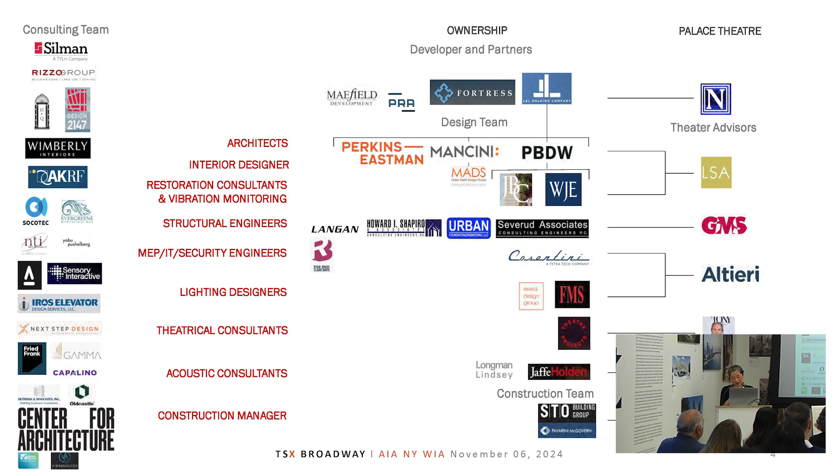So this is an immense team, and many team members here aren't even listed. It's a complex team, but as Rosalind introduced us, we don't have to reintroduce ourselves. A bit about the team: you can see the various stakeholders, including developers, owners, the theater - Palace Theater, which had its own consultants - along with sub-consultants, engineers, and peer reviewers. We tried to create an org chart for this, but it was very difficult to make it linear because a lot of communication was going circular, as well as working with the various stakeholders.

Beyond the technical expertise of the team, communication was key to understanding expectations of multiple stakeholders and decision makers, and how we coordinated amongst the owners, the developers, the consultants, the peer reviewers, the designers, and technical engineering. The success of this project really was the relationships and how we communicated with each other.

Just a broad overview on TSX, 47th and 7th Avenue, where the TKTS booth is, which Perkins also designed. It's a major redevelopment of a transformational public realm, with an indoor-outdoor public stage element that engages Times Square. If you've seen performances by Snoop Dogg or Jungkook from BTS, when that stage opens and is projected onto Times Square, it's quite immersive and engaging. This has become a cultural and hospitality destination, with a historic theater component and its elevational lift to create more retail space below. There's a whole story here that you can't even capture in 1.5 hours - it's only one part of the story.

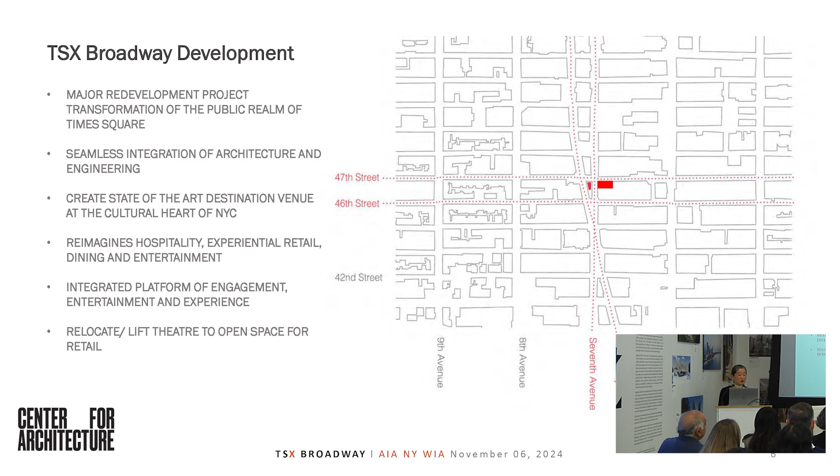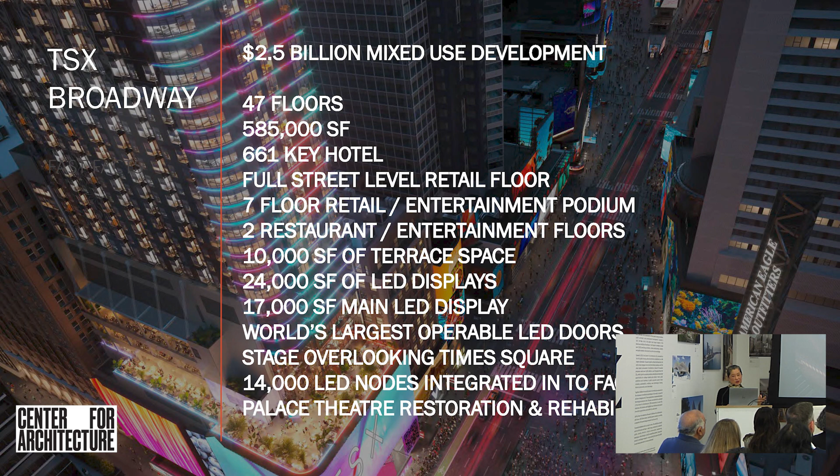This is a $2.5 billion redevelopment, including 47 floors with a hotel up above. There's lifting of the palace and restoration and rehabilitation of the Palace Theater, which created new retail space, as well as over 24,000 square feet of display screen that engages the public realm while providing signage. This entire building can be lit up with signage, terraces, and hotels - it has become a hospitality destination with a hotel component and the theater.

Some of the challenges included team coordination and integration of the various teams. However, we had regulatory improvements that included landmarks, retaining the zoning floor area, and looking at partial demolition. So if we go through a sequence of operations - the partial demolition, the stabilization of the theater, the lift of the theater - we can describe the regulatory review processes as well as historic preservation and restoration.

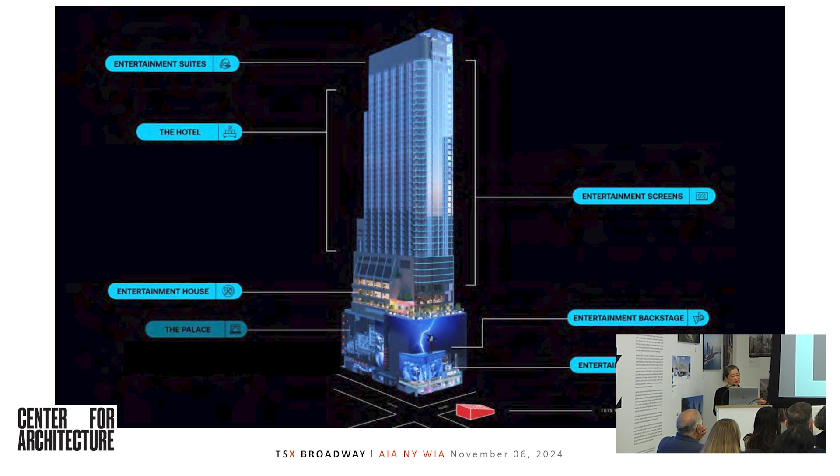As a broad overview of the development, you can see here the podium with the retail space and theater, as well as the indoor-outdoor stage and the terraces that have hotel floor lobbies. This communicates with the hotel, restaurants, as well as entertainment LED screens incorporated into the facade. Before getting to specifics of the theater, I wanted to give a broad overview of the code.

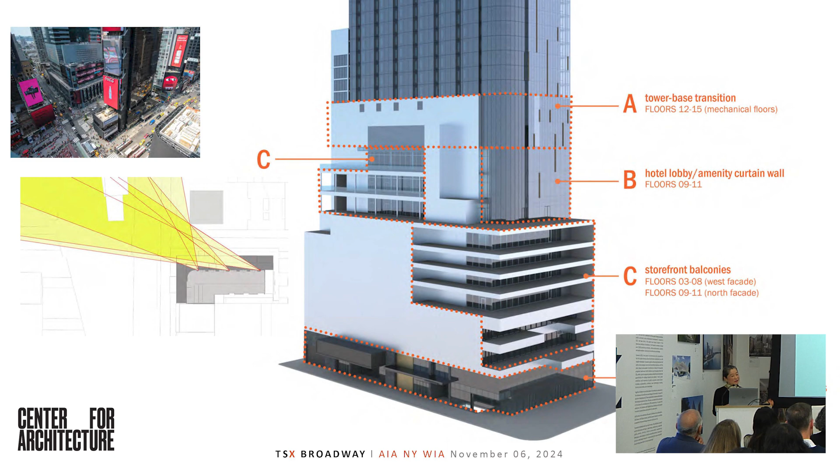This is behind the signage, and if you've walked through Times Square, that signage is very immersive. Behind the signage there are obviously components of retail balconies, a podium in the hotel lobby, and terraces. The facade was incorporated to try to capture the views of Times Square, especially with the hotel windows. You can start to see here on the lower left diagram the views from the hotel rooms.

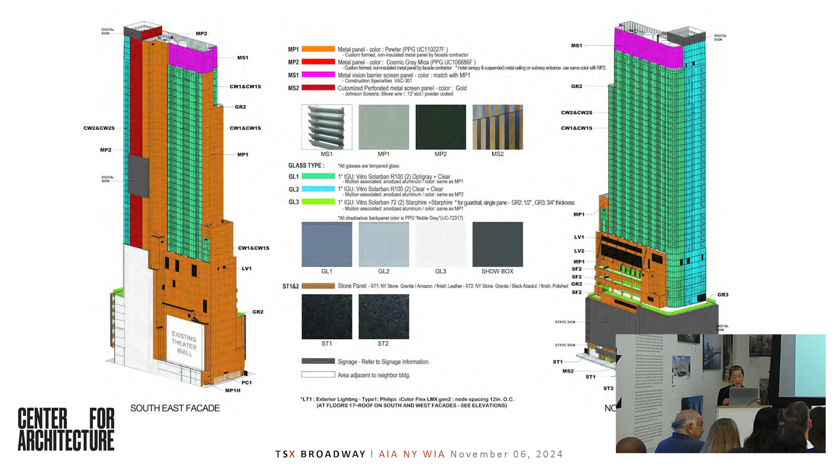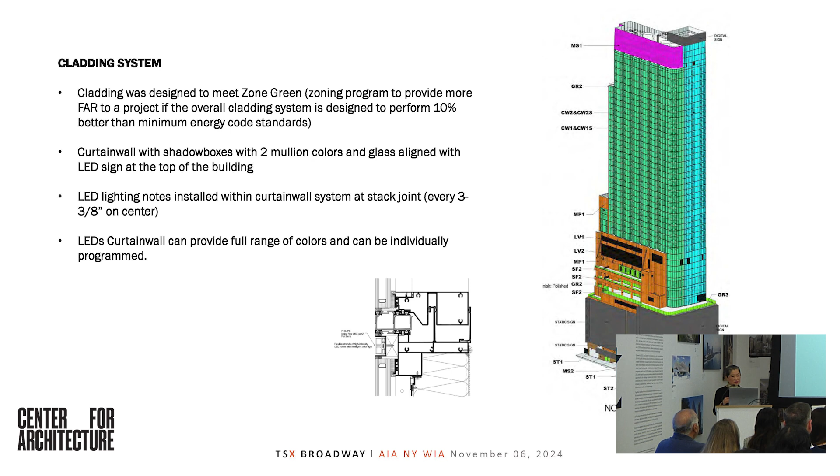Just a brief overview of the cladding - it was designed to meet zone green to get more FAR, with colors of mullions for curtain wall systems as well as metal panels, and organization of the curtain wall with the LED signage that's aligned. You can start to see a bit more development on how the signage works overall. There are LED nodes at every stack joint, so they are totally programmable with the full range of colors.

Thank you, Mindy, for the introduction to TSX Broadway. Now I'm going to invite you, the audience, to step back in time with me to take a look at the development of the site and also to consider the historic interior landmark, the jewel at the heart of TSX Broadway, which is the Palace Theater.

It's important for me to let you know that the perspective I'm going to provide comes from my experience of almost 10 years on the project, 9 years to be specific, straddling two different companies and two different kinds of experience. I was the project architect and project manager with PBDW Architects at the inception of this project in 2012.

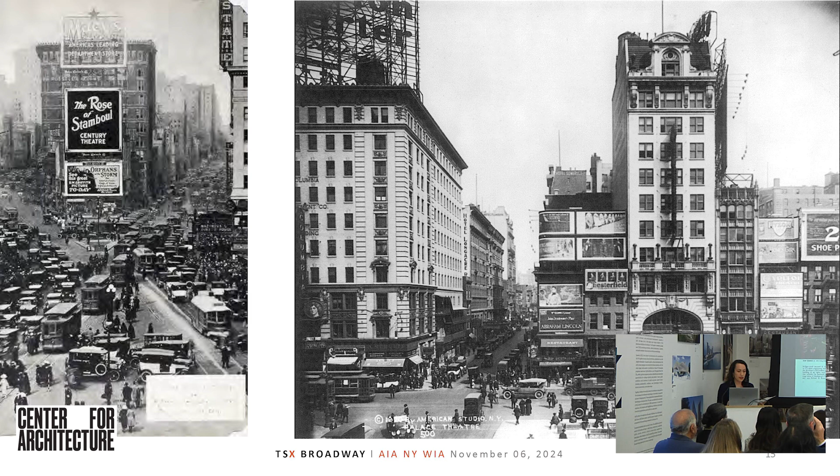So here's this development celebrated. The theater is not necessarily much impacted by this development. Let's remember this is an interior landmark.

Then 2012 comes along. A former client of PBDW, an architect and developer, had this motto: 'We need to design the opportunity to design.' And so he did. He passed by that building.

This photo is from around 2017. He looked at the theater on the ground and realized: if he lifted the theater, he could create two additional levels of retail. If he were to demolish up to 75% of the zoning area of the tower, he could then rebuild it to meet more modern standards.

He could also improve the urban environment by addressing that hodgepodge of signage we see there, and that corner has an MTA entrance to complicate matters further. Let's all remember that. So this was what the opportunity to design gave us—a lot to design.

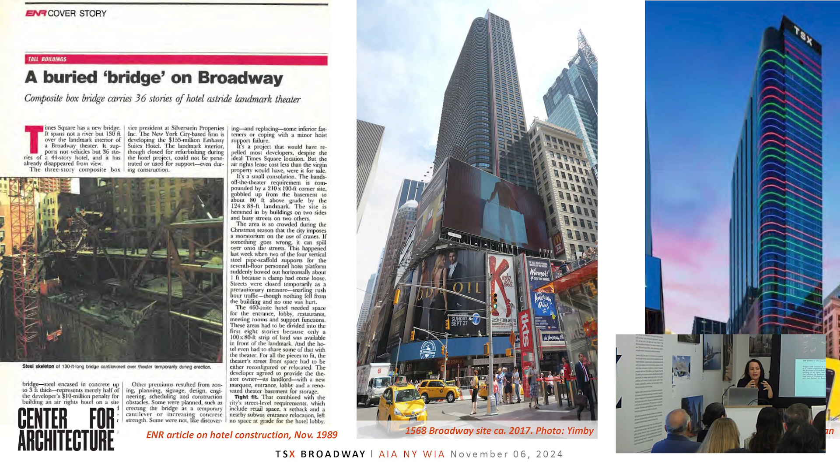It was very clear that at the core of that development was this Fabergé egg of a theater, which needed to be carefully conserved, preserved, protected, and monitored so that the lift, planned from the project's inception, could occur successfully—so it could be lifted and snugly fit into the concrete and steel bowels of TSX Broadway.

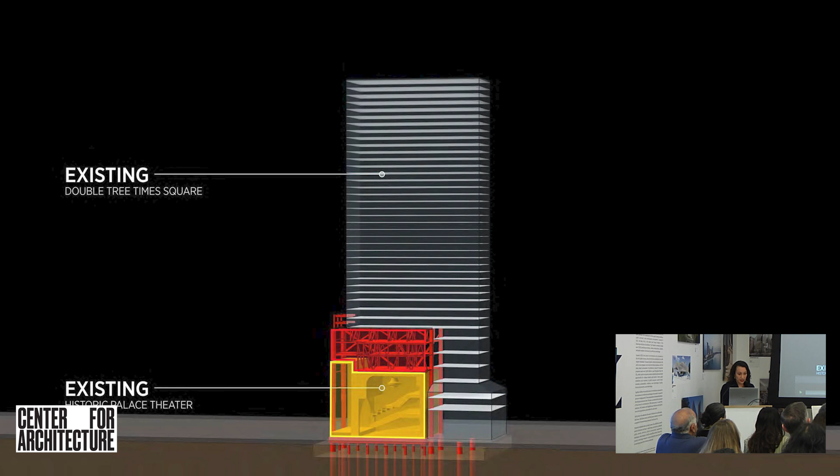This video shows why we had reasons for concern. There was a lot of construction activity, vibration-inducing activity, and WJE was heavily involved in vibration monitoring, using crack gauges, data loggers, and tilt meters, all implemented very early on. Let me start this video so you can see what we mean by vibration-inducing activity.

And I thought it was my video sound.

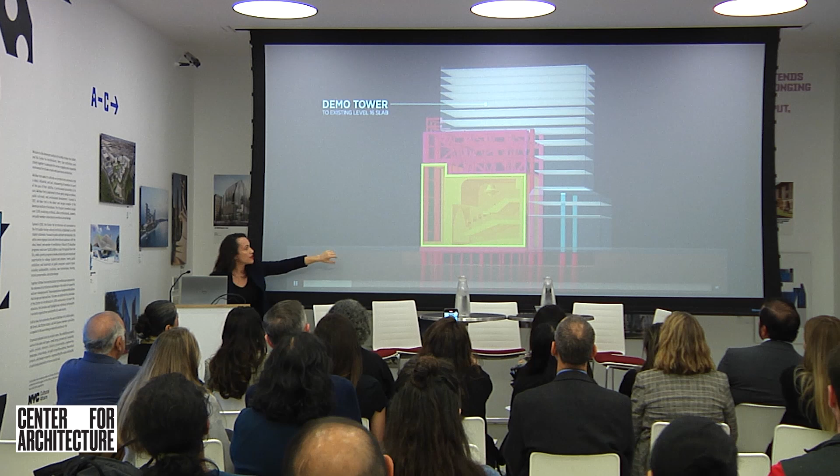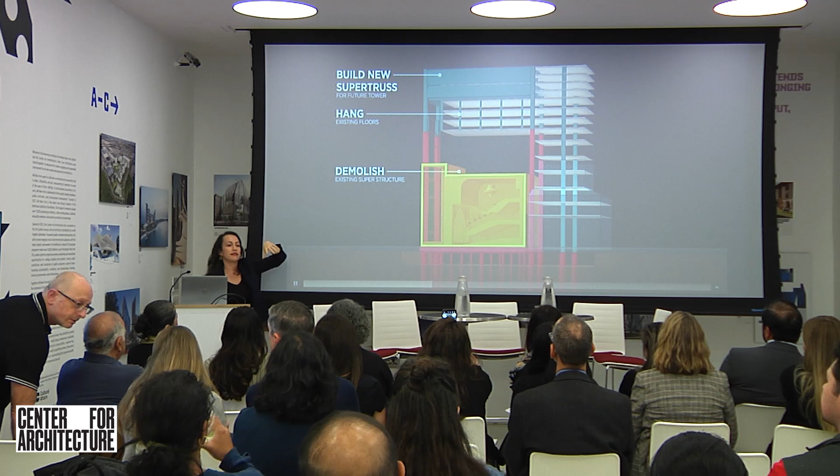At any given moment, you would have the Fabergé egg at the heart of the theater. Meanwhile, we needed to prepare the cellar, excavate, because we needed to provide a ring beam all around the theater and provide new lifting posts in order for the theater to be lifted. Meanwhile, the tower needed to be demolished. I said 75% of its zoning floor area, 25% retained, which allowed the rebuild to have the same square footage of the previous zoning resolution.

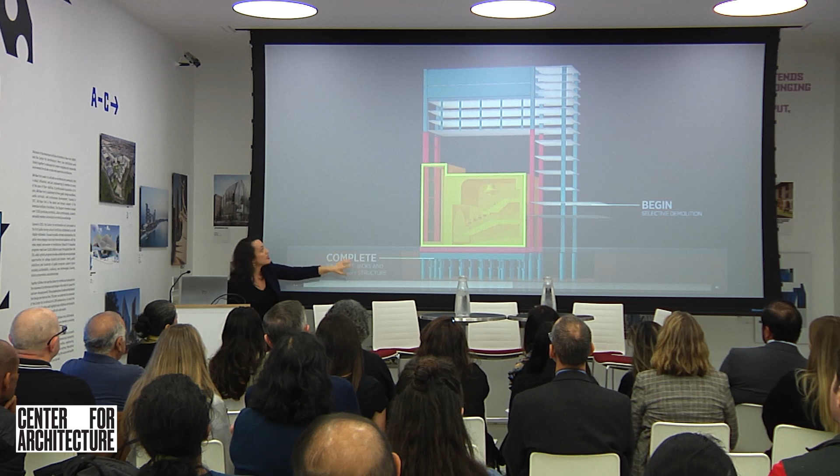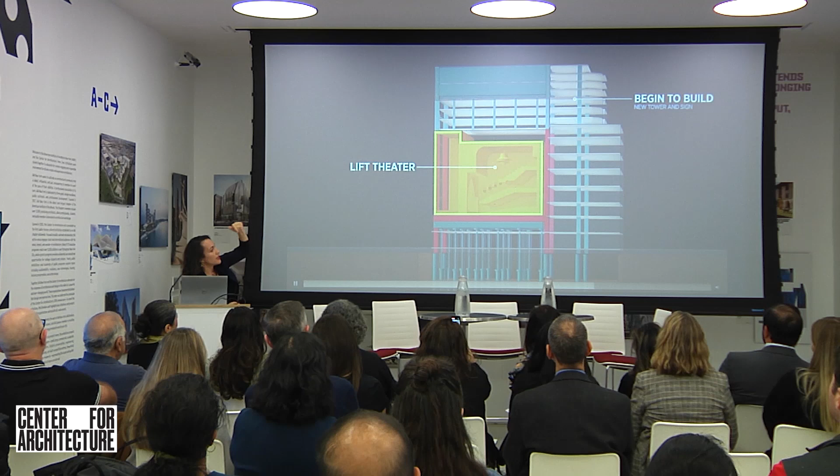Meanwhile, we have ring beams in place, the jacks are all in place, the temporary structure is all in place, but we needed to clear the top of the theater, but before that we needed to build a new structure that could support the floors above. And here comes the Fabergé egg, snugly fit in its new position. Then the full construction and reconstruction of the floors, led by Mancini and Perkins, took place, and the development was completed. That sets the stage for us to remind ourselves that if it wasn't for the lift of the theater, TSX Broadway would not exist.

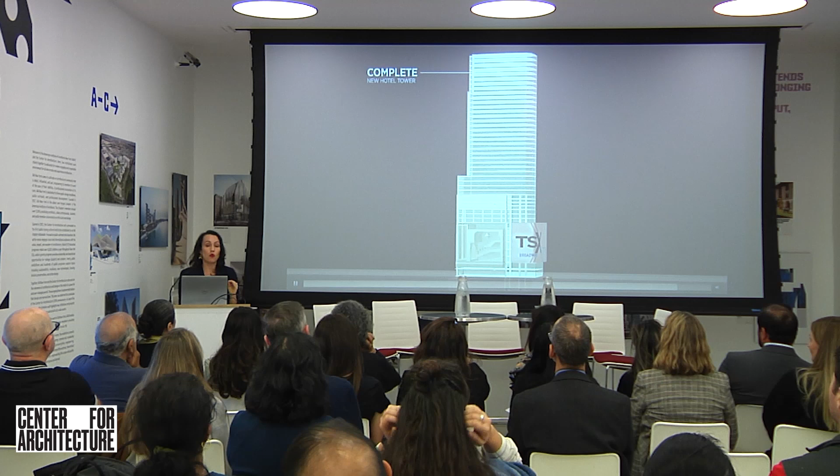One of the main early regulatory approvals we got was in 2015. We obtained approval from the Landmarks Preservation Commission to do this. They accepted it with a number of considerations. From that point on, we had a very close relationship with them in order to provide mock-ups, materials, a very long negotiation, which was really extensive.

Meanwhile, that also gave an opportunity to engage with a panel of advisors for the Nederlander organization. One of them is Judy Salzman, who's here, who's been engaged since 2015. So I invite Judith to come join me and explain, from her seat as the owner, or advising the owner, how she saw the development from her perspective.

I was brought in 2015 by the Nederlander organization, who owned and operated the theater since 1965. I've worked on a lot of preservation projects and theater projects, but when this was presented to me, the concept behind it, I thought, oh my God, how are they going to do this? It was one of the most difficult, complex, frustrating, and exciting projects in the course of my career.

As Deborah said, there was this Fabergé egg, and everybody who worked with me on this project knows I was very, very concerned, because I had worked on many plaster projects that had ornamental fibrous plaster, a material used in the late 19th and early 20th century that is subject to degradation from the environment, from water, from use. I had seen plaster collapse in theaters that weren't being lifted, weren't having excavations, and had a great deal of concern.

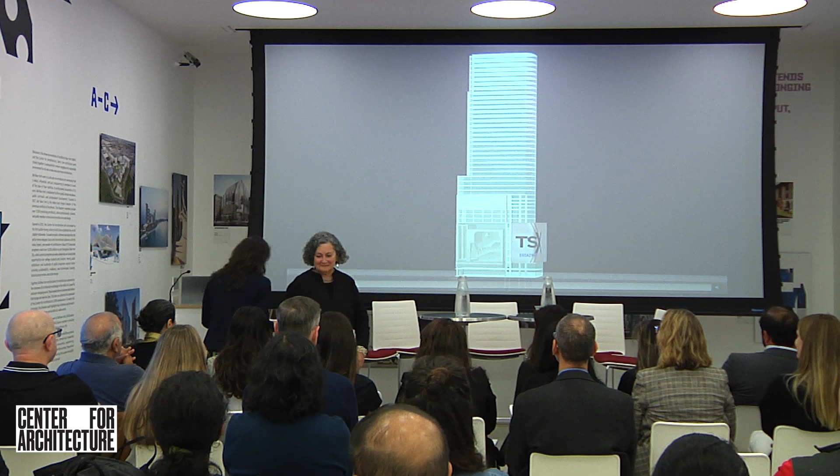So give you some insight on what we're dealing with. The photo on the left is actually very telling for us, because that's the moment when Judith suggested that WJE should get involved, given the concerns with the terracotta flat arch above the ceiling, which supported the whole fibrous plaster that we see here.

So we got engaged around 2017, and a series of surveys parallel to the production of construction documents was taking place. In terms of survey, it's important to notice the proscenium arch and the two pendentives on either side - very hard to reach areas, so we engaged industrial rope access.

We had to clean the plaster because there were layers and layers of dust - you couldn't even see if it was cracked or if daubs were damaged. So there was a lot of this scrape work to be done as well. We put the matting, and from that point on we were doing architectural and material survey. Eventually the scope of WJE increased to include the entire plaster, all the plaster surfaces.

There was a lot in terms of design that we needed to do here. This is a full upgrade of the infrastructure - the theatrical booms and railings are all replaced, we're replacing MEP systems, and putting in new hot water radiators instead of the steam, which was causing leaks and damaging the plaster.

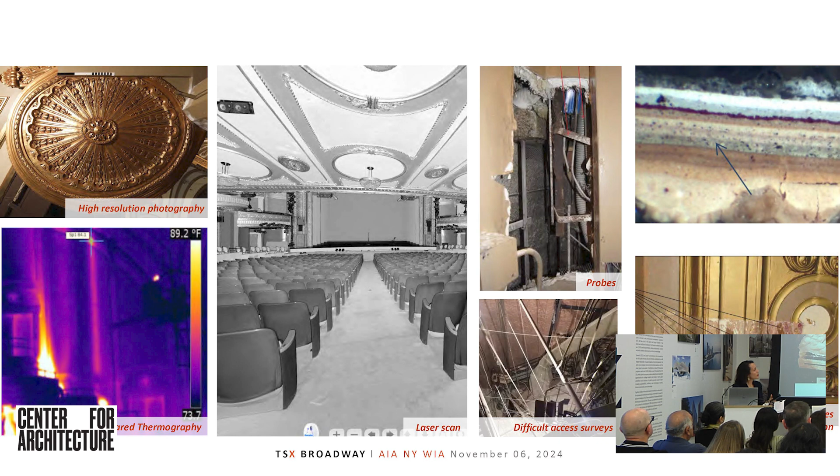Lessons learned here: probes, as typical, the difficult access that we mentioned, and then paint analysis, which the stratigraphy was done by Jablonski Building Conservation, which with PBDW, WJE were partners all along, working really close together with the advisory team. So mitigating risk was at the core of what we had to do, and that's the differentiation from your typical restoration project.

Here we need to prepare for pre-lift and post-lift interventions. So we worked with Evergreen Architectural Arts to have plaster casting made for virtually every decorative element in the theater. And these molds can last for a few years, so it will be useful for the client later on.

We also looked at some fragile elements, such as that register there to the right that covered, was all over the ceilings, covering ductwork, exhaust areas. Those only had very thin threaded rods as support systems. So WJE also got involved in designing the structural support for a lot of the plaster where it was shown to be defective or fall short from current standards.

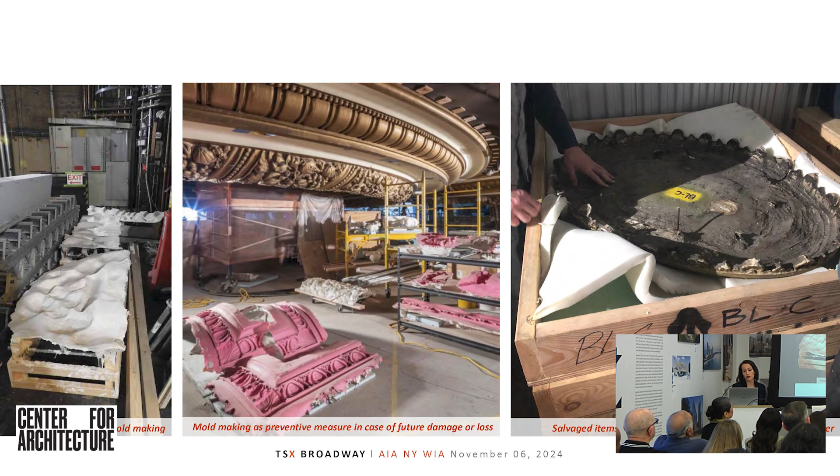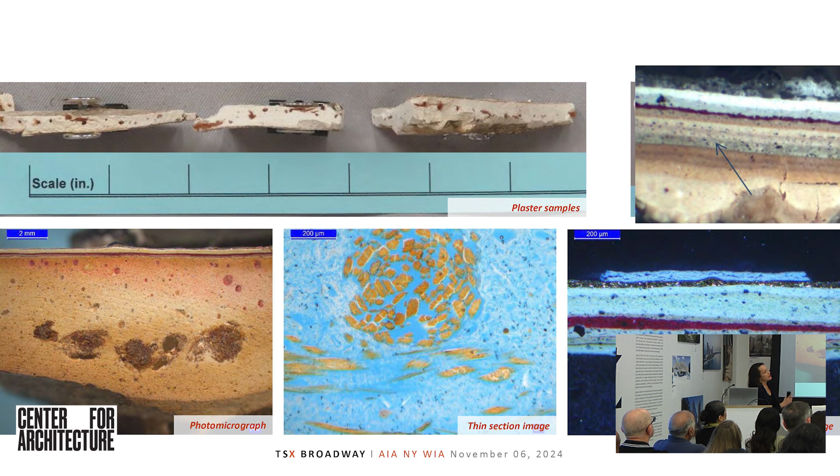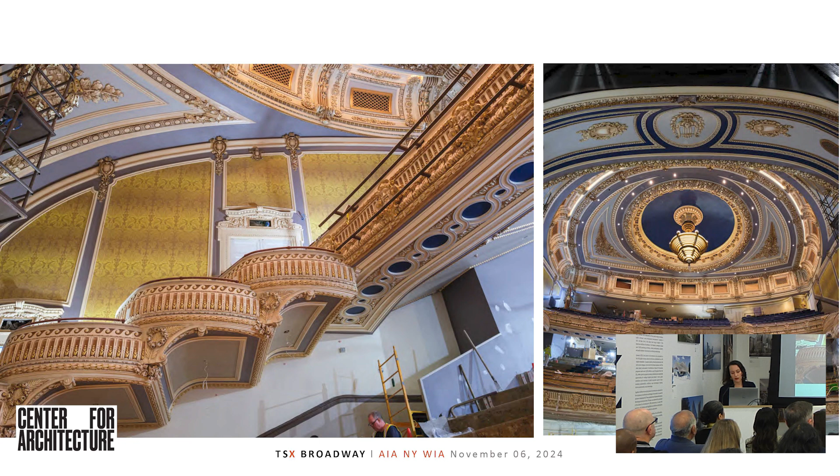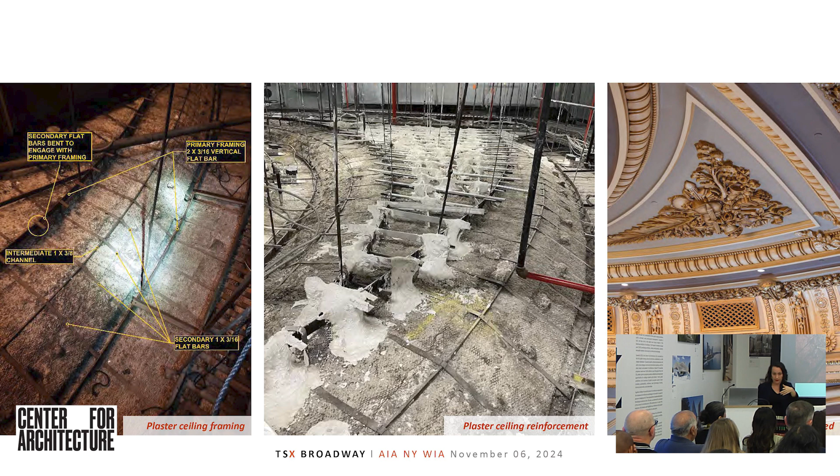This is a very interesting photograph for me. John's shaking his head like, how can she like this? Because this is a plaster dab. So under here we have stainless steel wire ties, really connecting these elements, the framing to the old framing or to the aluminum. And this was done pre-lift, and that's why it's interesting. Another aspect - we had to determine what to do pre-lift or post-lift, because if you plaster it and then you have an issue with the lift or construction activities, you have to redo that work. So you want to protect Allison from Structure Tone having to do it all again. And that's the final result there.

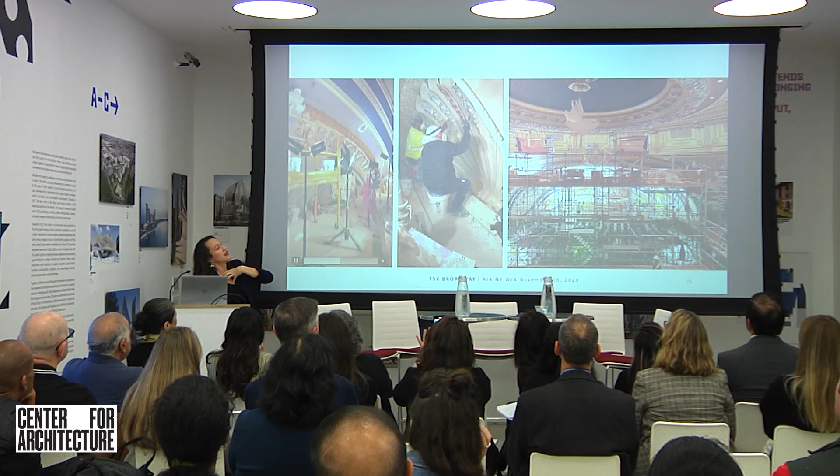Mock-ups. Not only paint mock-ups, but also, you see this sad swan of a foam core mock-up there above. That is me sitting at 3 o'clock in the morning, thinking, will the chandelier block the view from the follow spot booth? Even though the theatrical consultant had calculated it in the BIM, I could only relax once I created that with the team. After a whole day of going up and down, we decided to lift it 3 feet more. So the lesson learned is: do all the mock-ups you can, put all mock-ups you can on your specs, buy your mock-ups, do them in analog ways, and retest everything.

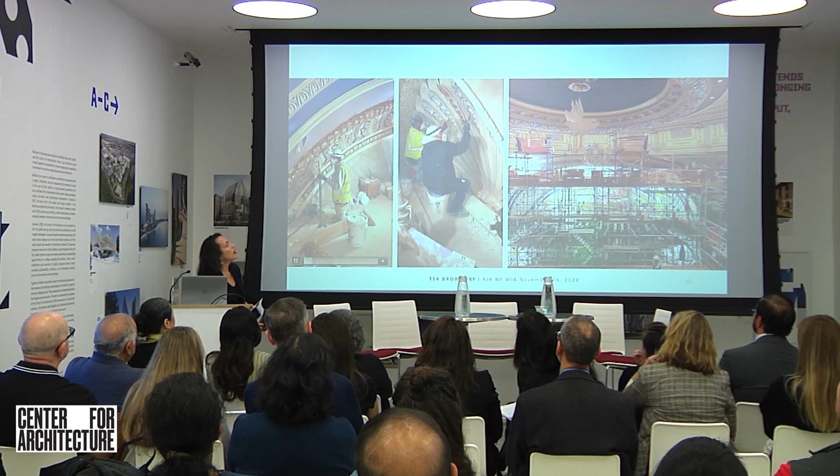And also the painting mock-ups. This for me tells me about one of the favorite parts of the project, which is about collaboration and communication. These are the decorative painters, the amazing team that Evergreen brought to site for us. You can see them gilded there, that's aluminum leaf, which was then glazed to look like old ivory and bronze.

Coordinating the hands of all of these men is a very difficult task, and we have to be there on site constantly checking and doing quality control as much as we could. That was a big challenge for everybody involved, but it was such a pleasure to work with people from this team. I really had the most beautiful time learning from them, arriving with the mentality that they're doing this day in, day out.

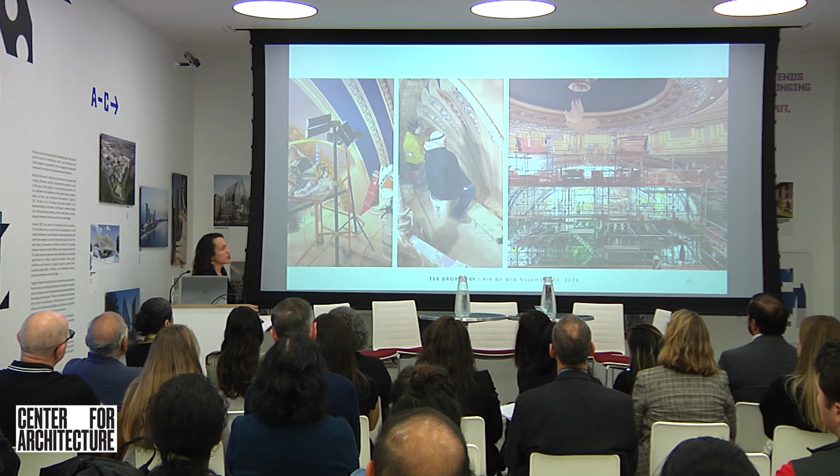Sorry about that, but that's how the site sounded like. True story.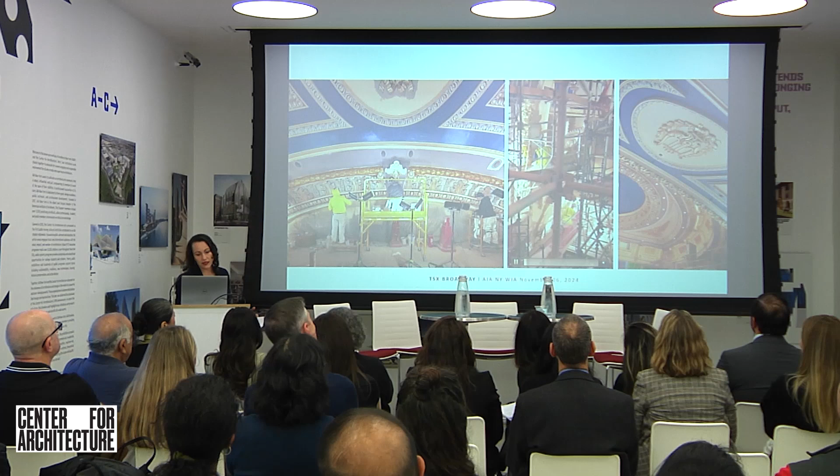But you can see the beehive of activity that it was at any given time, and access with the scaffolds, and just a lot of traffic that Allison had to be on top of people all the time. Monitoring of the environment was a key item, and that's how materials came in and out, and that was a big challenge as well that we must say.

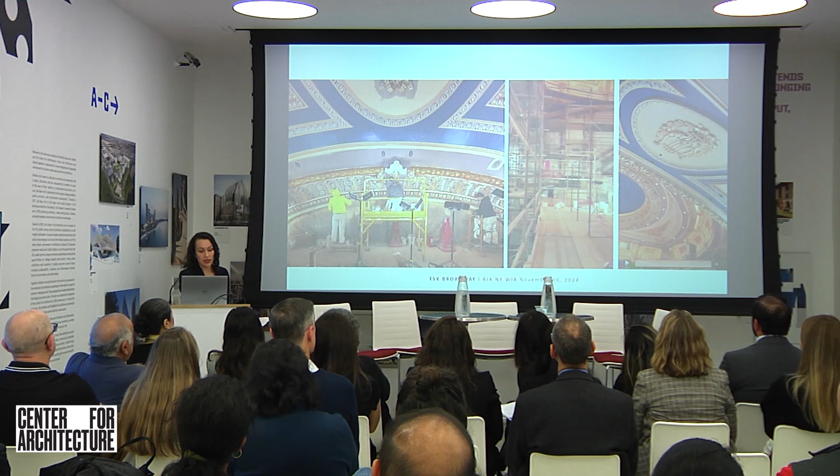Moving on, I will end with this slide. If you're asking me how do you get a project of this scale and complexity to be successful, I would say a mentality of collaboration, communication, finding your allies in your team - the people that can be on speed dial and text you 9 o'clock at night when you need to get that done, what you want me to do. That was ongoing. And also the determination to understand that you're going to go above and beyond for a project like this.

And on that note, I'll pass it on to Dominic. He's going to give us the client perspective.

Hi everyone, I'm Dominic Canizo. I was a member of the development construction team. We had a pretty large team complementing a project of this size, but I primarily headed up a lot of the subsurface and the theater work for the developer. So I'm going to present some of the construction and engineering challenges that were integral to the project, one of which is the retained floor area.

So while this project doesn't happen without the theater lift, retaining the zoning floor area is also a critical aspect of the project. The Times Square area had been rezoned since the tower was built in the late 1980s, and there's a code that says if you maintain 25% of the zoning area, not gross area, you can rebuild back to the original zoning area. By doing that, we were able to build to about 85,000 ZFA larger than if it had been just a new building.

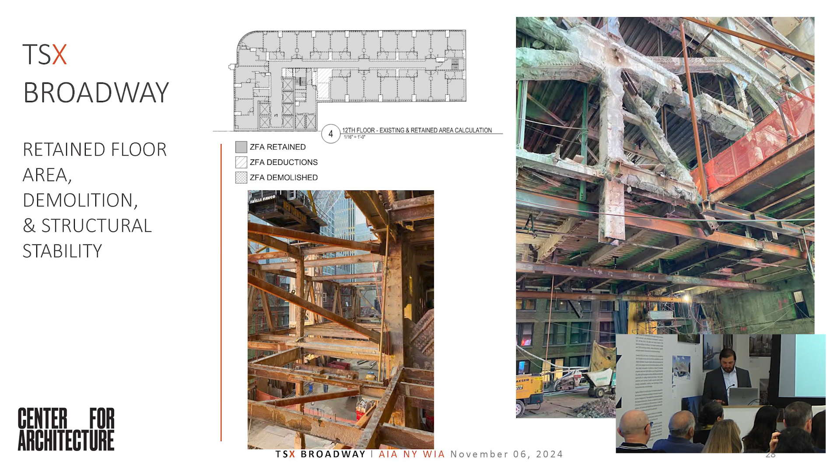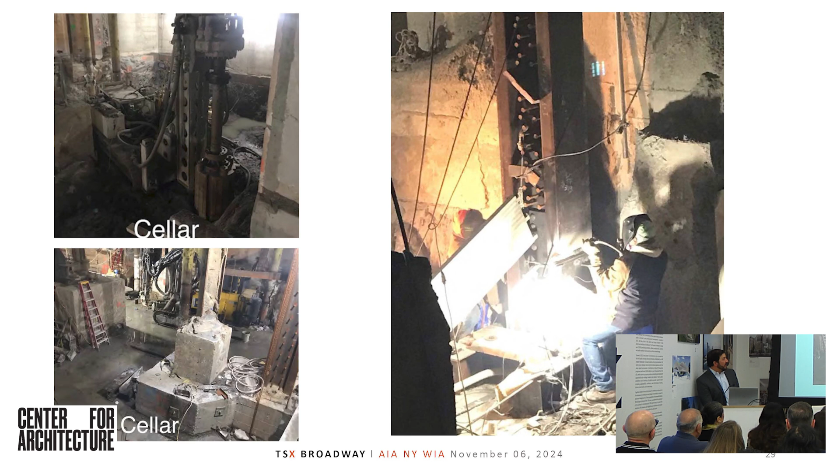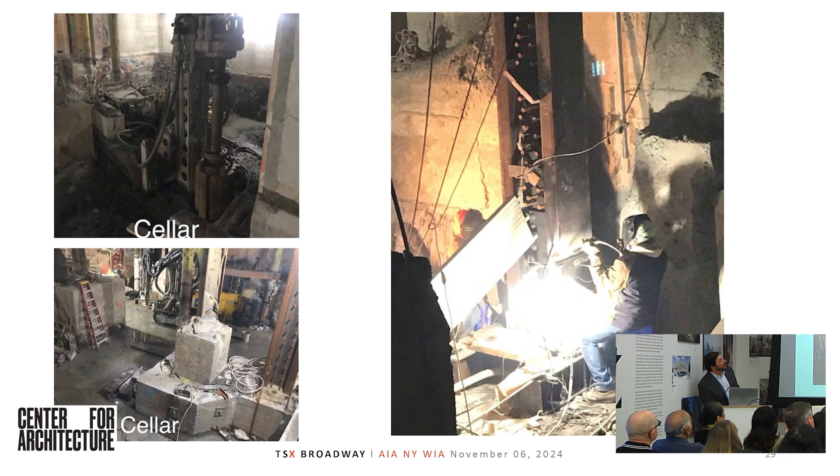Other challenges associated with this work are the excavation and foundation work. We retained the majority of the ground floor, so bringing equipment in to do excavation was incredibly challenging. We couldn't drop full-length caissons or piles into this space—we had to splice everything in 8-foot sections. That section to the right is a 14 by 873, almost like a solid steel box, one of the largest sections you can get in the world. It had to be ordered from overseas months in advance, and these had to be spliced every 8 or 10 feet depending on where you were in the building. You see 2 welders working on that splice—they had to do hundreds of passes continuously over multiple shifts to make sure the welds didn't cool. This was days of welding, and we had dozens of these. It's just a very challenging aspect of the project.

Working in the cellar in general was difficult—working around the existing structure, removing things when the time came, but working around what had to stay.

More on excavation—what you're looking at here is directly underneath the theater. The theater foundation had masonry columns about 20 foot on center. Tony Mazzo, who was the brain behind the foundation and the theater lift, the foundation contractor, couldn't move equipment into that type of space. So he had to think up an unorthodox shoring method for the theater orchestra slab, visible at the top of the left photo. Above the orchestra is essentially a bridge, so to speak. He hung the floor at every other column, which enabled him to remove half the columns to make way to get equipment in there. What you see are temporary piles supporting the existing masonry columns, and those angle braces going up—bracing to angled irons, which have hangers through them, supported by the floor above. It's one example of the outside-the-box thinking and challenges that went into something like this. Excavating a new subcellar underneath an existing building that retained 16 floors of structure was incredibly difficult. On the right, you see the start of one of the lift posts, which I'll get into more now.

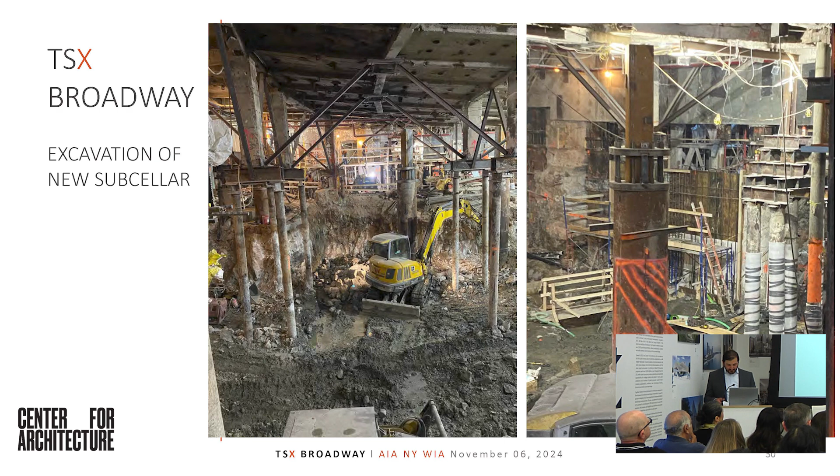This is another really uncommon and interesting aspect of this project—our new transfer truss. Instead of doing a very complicated structural steel bridge truss similar to what was there before, Severud, the structural engineers, came up with the idea to do a post-tension truss, which isn't uncommon in the US and around the world, but slightly uncommon in New York—not a lot of them done here. There were 3 separate 4.5 by 120-foot-long by 44-foot-high concrete girders, which spanned from the 12th to the 16th floor of the building. Included in them were conduits through which high-strength cables were run, and as the building was raised, as floors were added to the tower, these were tensioned systematically throughout the process as different loads were added onto them.

One of the challenges in doing this, and in mass concrete in general, is concrete temperature. There were real concerns around what the temperature of the concrete would be, making sure it didn't get too high, and how we'd know what it was. Severud asked us to consider putting sensors in there, which was relatively new—the company we engaged for it we'd never heard of, but it's since been bought up by Hilti. We installed hundreds of sensors on the rebar cages, which gave us real-time information on the concrete temperature and allowed us to make decisions. There were areas where it did get too hot—we had to do cores, evaluate what happened to the concrete, and it ended up that we have to keep a waterproof paint on this truss indefinitely. That's an operational concern—we need to make sure that as the building transfers hands, we put signage up there.

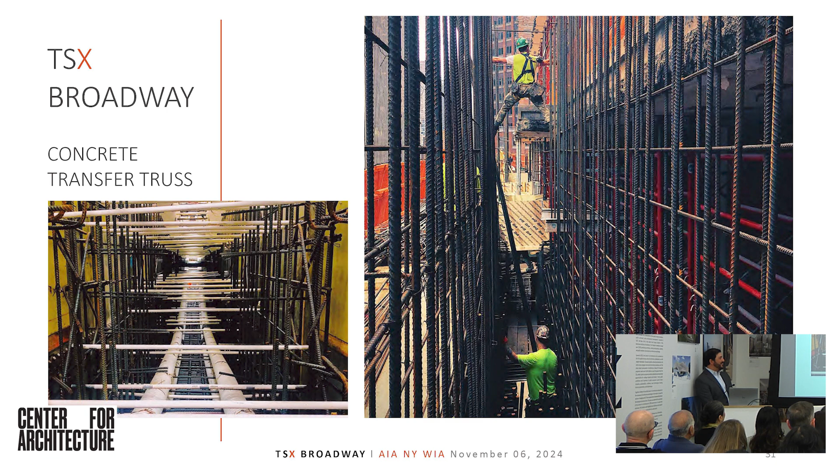All right, so I'll talk a little bit now about the theater lift. Here's a snapshot of the lift plan. The lift itself utilized 34 lift posts, each with 450-ton jacks, and it lifted the theater, which was 14 million pounds. One of the most critical components of the theater lift was the ring beam. Deborah touched on this.

Theaters in general have very little internal structure, which is done intentionally to not obstruct sight lines. So in this theater, there's 4 balcony columns and 2 proscenium columns. That's it - that was the inside of the structure. So the majority of the structure is structural steel framing within a very robust masonry perimeter wall.

The way this was organized was we put a very high-strength, stiff concrete beam underneath the perimeter. This is called the ring beam. What that does is it distributes the loads, the point loads from the lifting posts, across a larger area of the masonry so that you're not getting differential movement in the walls as you raise it.

In that lift plan, you can see - well, you can't see it, but I'll tell you - there's 24 lift posts around the perimeter and 10 at the interior structure.

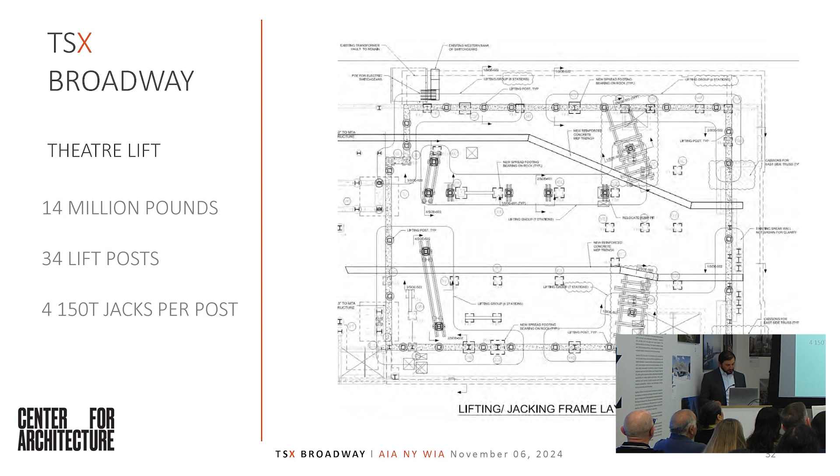Here's a snapshot of the lift post assembly, which utilizes a hollow caisson sunk over 30 feet into the ground. Inside that caisson is a structural steel tube section and 12 threaded rods. They work in unison to transfer the load from the jacks to the tube steel, which is actually what is pushing up on the structure of the theater. It's hard to visualize, but it's actually really quite simple.

What Tony came up with here is a way to lift the theater without having to rely on any interim load transfers. So even during periods when we paused the lift to install other structure, the theater itself is always being held on these lift posts, which reduces the need for load transfers and the potential for cracking or damaging the theater. The only load transfer we did was at the end of the job, end of the lift, when all the new structure was installed, transferring it onto its permanent structure.

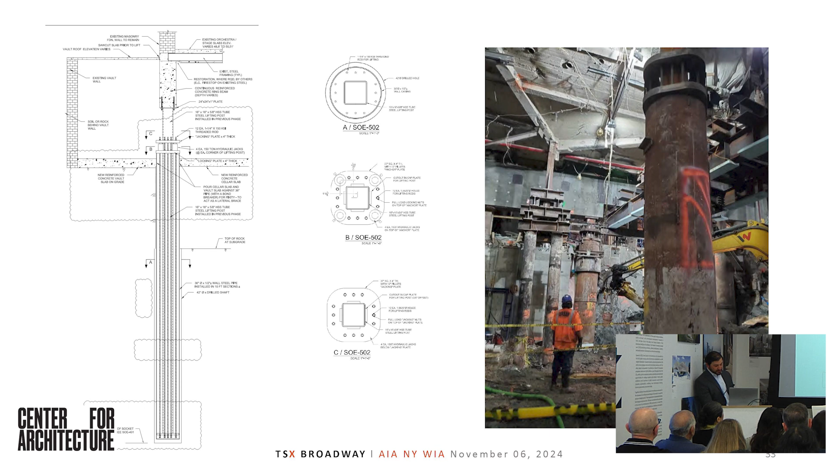So here's a better shot of the working end of the lift post. There's a little video in here - sorry, how do I get this done?

What you see here is the tube steel, the threaded rods, and the jacks between two large plates. Each of those threaded rods has two nuts, one on the top plate and one on the bottom plate. As the jack pushes the top plate up, the top nut engages, so that's what's taking the load. The threaded rod is lifted because the nut is holding it in place. As the threaded rod goes up with the jack, the bottom nuts lift with it.

As this jack goes up to almost its maximum stroke out, which was about 5 inches or so, the bottom nut lifts up. Once that cycle is complete, you lower that nut on every single lift post, and that re-engages the load back down into the bottom plate. You can then reset the jacks, lower the top plate, lower the top nuts, and do it again. It's very much like an inchworm - we inchworm the theater up 5 inches at a time, landing at 30 feet.

For people wondering, it took 15 days of actual lifting over 2 months to lift the theater up to its full 30 feet, just under 30 feet. All of the posts moved at the same time. Yes, and it's difficult to condense that process.

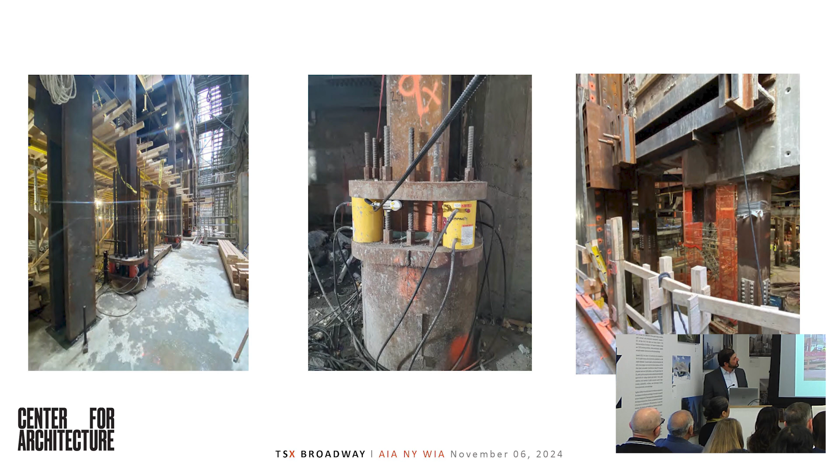Lastly, here's a nice shot that ties it all together. What you see there is the ring beam - it varies in depth depending on where in the theater you are. The back of the theater where all the seating is has more load than the front, which is mostly open. You see the lift post - this is about halfway through. Above, you can see the new structural steel framing supporting the Palace Theater Orchestra.

Eventually this area was infilled with new permanent structure, and the theater was transferred to that structure, the final load transfer. One thing we talk about as a lesson learned - the lift posts interfering with spandrel members at the outside of the building wasn't considered well enough. This was quite a big miss.

We did not think about how we were going to take these lift posts out in order to install this perimeter steel. It involved a lot of coordination between the temporary structural stability engineer, the lift engineer, and the engineer of record to determine what sequence we could actually remove these things one by one, which had to coordinate with steel already fabricated and ready to go, in order to remove these posts, get the new steel in, and deload the theater onto that new steel.

Now I'm going to let Allison talk about some of the other challenges from a CM and construction perspective.

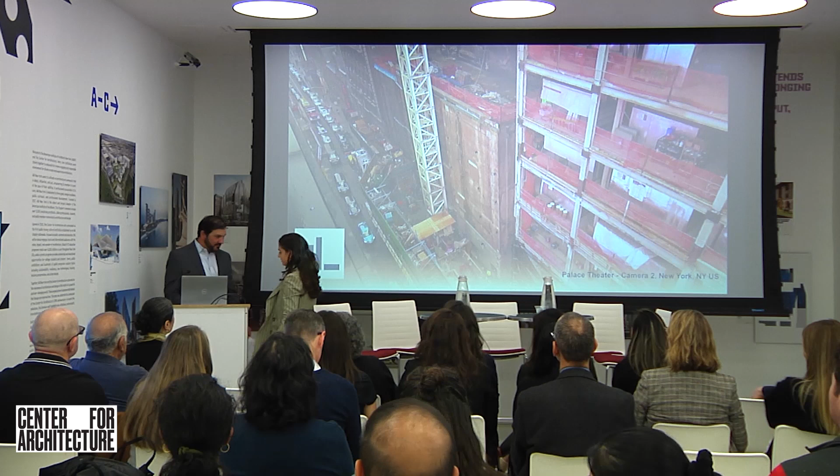Hey everyone, I'm Allison. I was one of the many - hi Mike. Mike is also one of the superintendents on the project. So there were many of us in different phases.

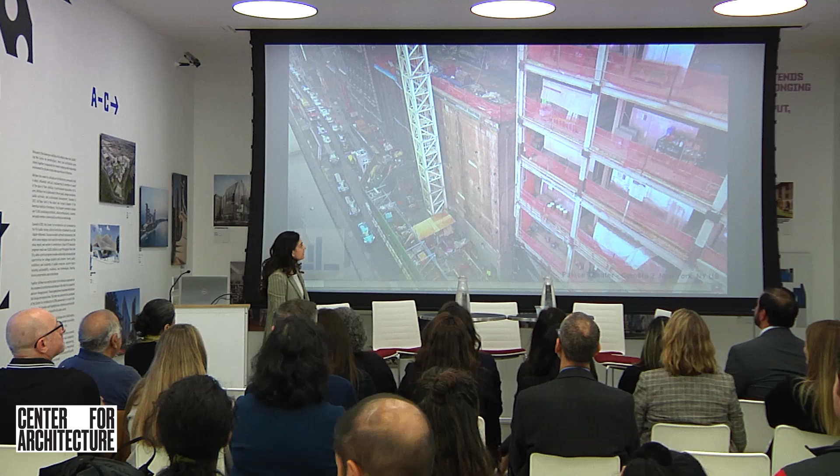Here's a little time-lapse video showing the lift of the theater. If you can see on the right, there's a finger pointing showing the theater has been raised. Did snow pop up? Yes, snow popped up, which was a great example of one of the major challenges we had day in and day out: the elements.

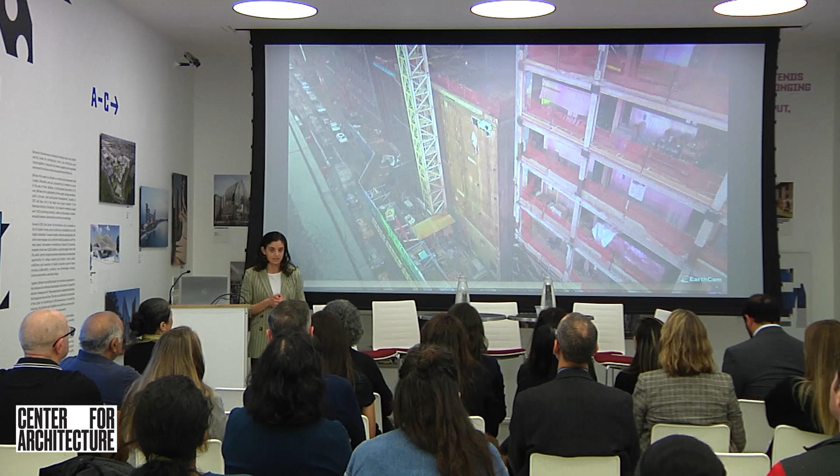This project spanned over 5 years, so we had snow, wind, rain. Sometimes the facade was open to let excavators in. We had to reconstruct the corner of the facade, which wasn't anticipated originally. On top of that, tradespeople needing to load in, schedules to hit - keeping doors open or blocking them open was truly the bane of my existence and Mike's existence, because we had temperature and humidity controls throughout the theater we needed to maintain.

And then on top of that, demolition of an entire tower above, which you use water for dust control and you want to use a crazy amount, right? It's important for the safety of the workers, but it's that balance of meeting halfway, maintaining safety, but also maintaining the theater in good condition. So that was one of the big day-to-day challenges.

Another challenge, in Deborah's photo, you saw all the scaffolding. We had to touch every single piece of the walls, as it was written in the contract. So we loaded in the scaffolding at the normal 47th Street entrance, with openings throughout from old fire escape doors. Then, as we're loading out 4.5 years later, the theater's lifted 30 feet up in the air. All of those openings had to be blocked in for structural stability. So we had to anticipate that and come up with a plan to remove all the scaffolding, materials, steel—all that logistics that you don't always think about in design. Super important for us.

And then the final fun, nifty thing someone came up with—we had to maintain standpipe access throughout the lift of the theater, which was crucial and required. I think it was Ron Pinella, if anyone's worked with him, but it might have been someone else—came up with a knuckled standpipe connection system. So as the theater was lifting, we had enough standpipe in the cellar, and as the theater raised, it would lock into place and then go into the next. That way we were able to maintain an active standpipe, which was hard because the FDNY was nervous about this project too—if something happened, how do they get in and save it, and how do they save people?